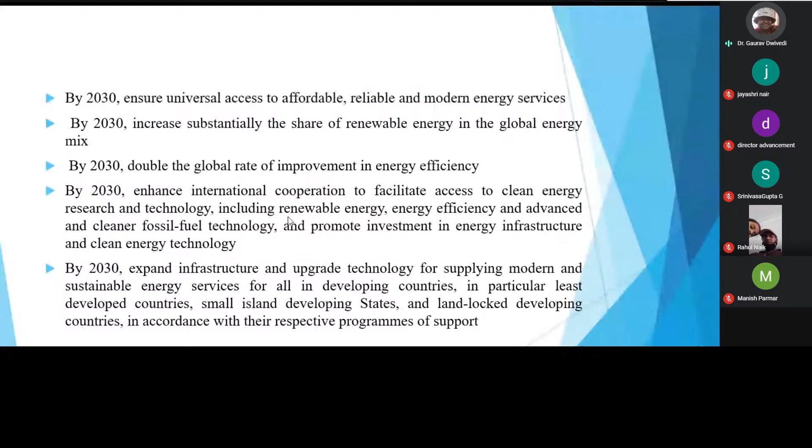By 2030, the goal is to expand infrastructure and upgrade technology for supplying modern and sustainable energy services for all, particularly in least developed countries, small island developing states, and landlocked developing countries, in accordance with their respective programs of support. So by 2030 we have set targets in the energy and renewable energy sector. India's target is to reduce the emission intensity of its GDP by 33 to 35% by 2030 from the 2005 level.

40% cumulative electric power installed capacity jump from non-fossil fuel based energy sources by 2030, a jump of 33% over non-fossil fuel capacity by 2015.

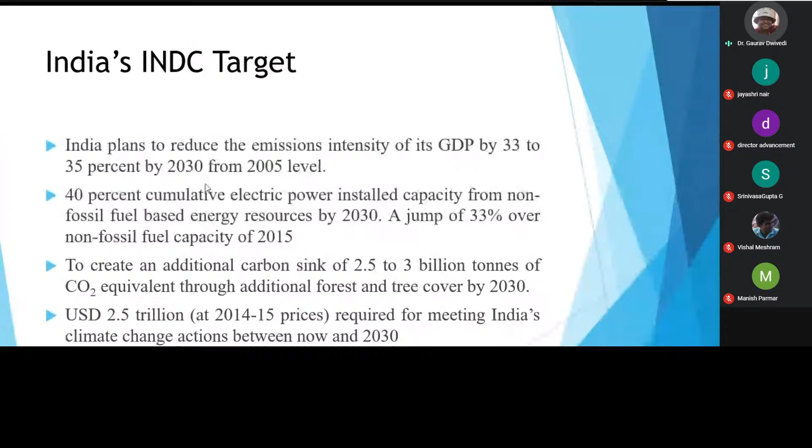To create additional carbon sink means we have to plant more trees, cover more area, up to 2.5 to 3 billion tons of CO2 equivalent through additional forest and tree cover by 2030. For this, we have to expend a lot of money, and the amount will be USD 2.5 trillion required for meeting India's climate change actions.

Now, what are the targets related to renewable energy? In the area of renewable energy, we want solar and wind energy to be increased from 4,060 megawatt and 23.76 gigawatt from 2015 level to 100 gigawatt and 60 gigawatt by 2022. And we are moving very fast in that direction, we are nearly achieving that solar and wind energy target.

It is envisaged to increase the biomass installed capacity to 10 gigawatt by 2022 from the current capacity of 4.4 gigawatt. So in the area of biomass, we have set the target of 10 gigawatt. Then a special program to promote small and mini hydro projects. New and efficient design of water mills have been introduced for electrification of remote villages and will continue to be promoted.

Now, what is happening is that in the case of large hydropower, when we want to develop it, the land area requirement and the ecology of that particular area gets disturbed. So the government of India is not promoting large hydropower. Instead, they are promoting small hydropower, which does not affect the environment and ecology of that particular area.

And what is meant by small hydropower? The power plants with a capacity of less than 25 megawatt are known as small hydropower. So the government is promoting those types of plants.

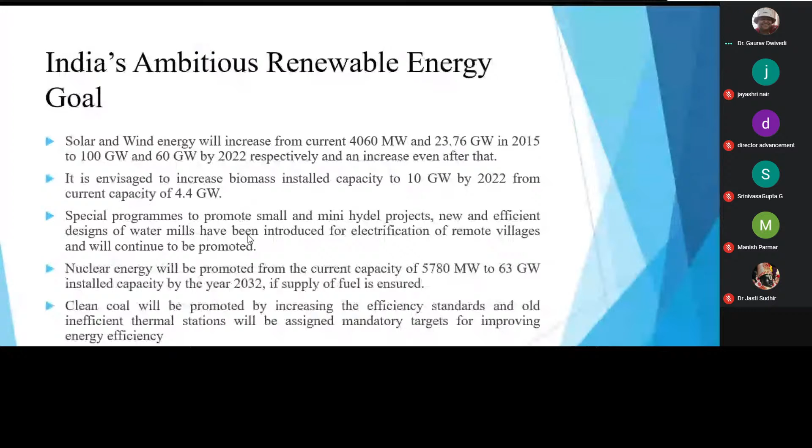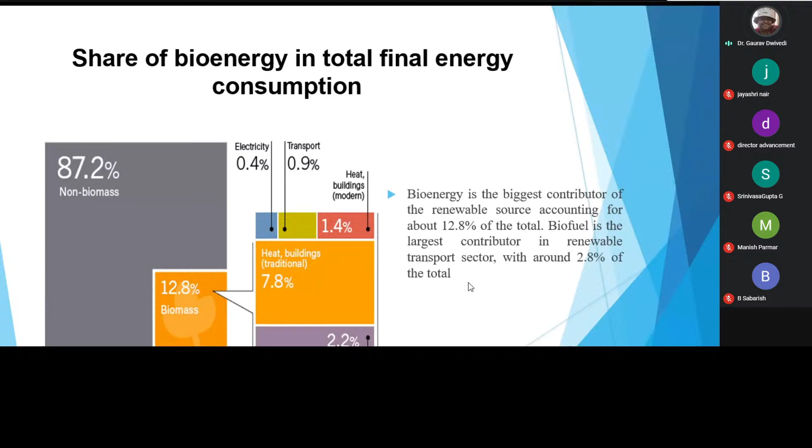Now, if we talk about bioenergy, it is the biggest contributor of renewable energy sources, accounting for about 12.8% of total. And biofuel is the largest contributor in renewable transport sector with around 2.8% of total. So biofuel is also contributing to the total transport sector in renewable energy.

Now, what is happening with our crude oil? We are importing large amounts of crude oil from other countries. Why are we importing? Because our domestic production is very less. If you see up to financial year 20, it is very less, and we are importing large amounts of crude oil, and this is increasing because we are not fulfilling our crude oil demand as per our requirement. We are not able to meet it, so we have to import.

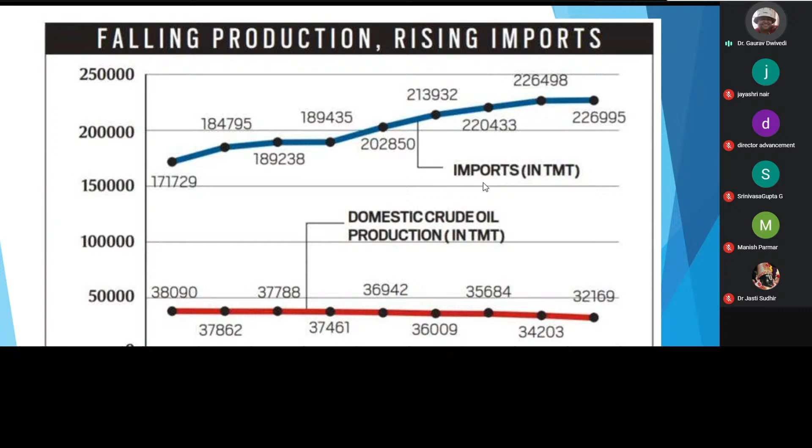So to overcome this import, we can develop various types of alternative sources like development of alternative fuel, electric vehicles. There are many options. We are working on that so that this import burden should go down.

So in that direction, the Government of India has developed the national policy on biofuel, and the national biofuel policy has set some targets. What are those targets? First is an indicative target of 20% blending of ethanol in petrol and 5% blending of biodiesel in diesel by 2030.

Then, with the thrust on advanced biofuel, the policy indicates a viability gap funding scheme for second generation ethanol biorefineries of rupees 5,000 crore over 6 years.

Then categorization of biofuel: basic biofuel or first generation biofuel includes bioethanol and biodiesel; advanced biofuel or second generation biofuels include ethanol drop-in fuels; and the third is algae-based third generation biofuel. So we have to categorize the various biofuel sources.

Then increase the scope of raw material for ethanol procurement by encouraging intermediate sugarcane juices, other sugar containing material, and damaged as well as surplus food grain. This is very interesting.

Actually, the production of ethanol is from sugarcane, but there are other sources. So the government has said that waste food grain can also be used as a source for production of bioethanol. So now this damaged and waste food grain can also be used.

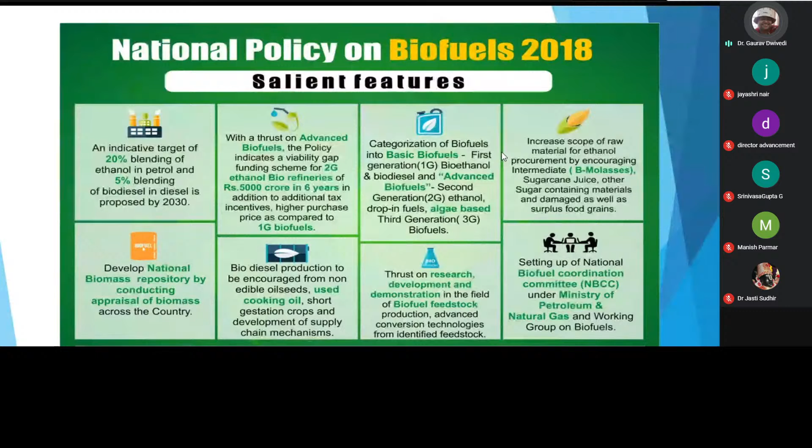Then thrust on research areas in the development of biofuel like biofuel feedstock production and advanced conversion technologies, and last is setting up of the National Biofuel Coordination Committee under the Ministry of Petroleum and Natural Gas and a Working Group on Biofuel. So these are some salient features of the National Biofuel Policy.

Now, some people may ask why the vegetable oil which we are using in our kitchen can't also be used for the development of alternative fuel. Now, if we use this vegetable oil as an alternative fuel, then there will be a crisis regarding food versus fuel.

So what can we do? We have categorized the oil which we are using for food purposes as edible oil, and the oil which we cannot use for food purposes as non-edible oil. In edible oil, we have canola, cottonseed, rapeseed, soybean, coconut, then mustard. There are various oils we can categorize as edible oil.

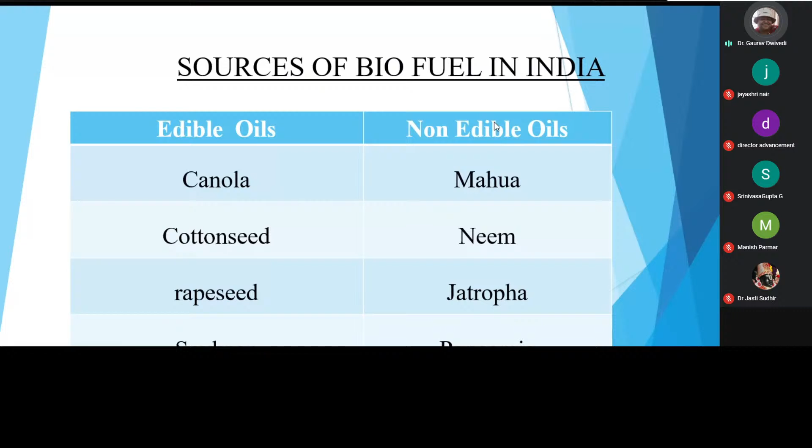Then we have non-edible oils like mahua and neem. Both oils are non-edible, but mahua and neem have their medicinal uses. So we cannot divert them for fuel production. Now we are left with Jatropha and Pongamia. Jatropha and Pongamia do not have very significant uses, so these can be used as biofuel crops in India. Jatropha is the number one crop in terms of area and number of trees. Pongamia is the number two crop.

Now, why are we not using the oil directly for engine operation? Why are we converting it into biodiesel? This is the one question that comes into everyone's mind. Why is it necessary to convert this oil into biodiesel? Why are we spending so much time and money to convert this oil?

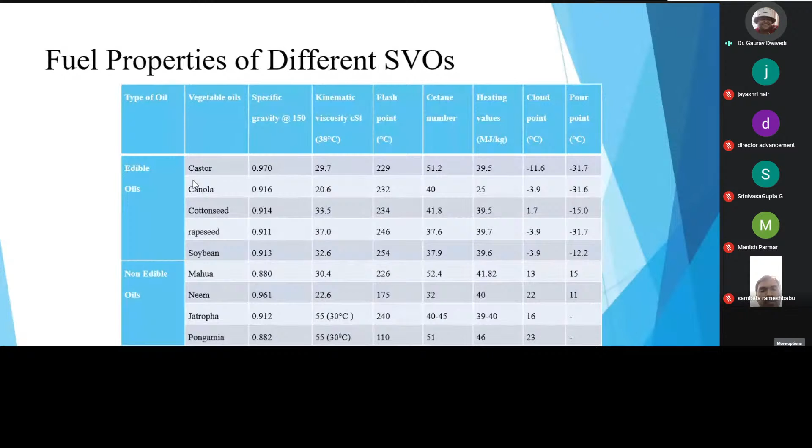Now, compare the properties of all the edible and non-edible oils with petroleum diesel. We have taken edible oil only for study purposes, not for actual use. The kinematic viscosity of the edible oil is all in double digits. Non-edible oil is all in double digits, while petroleum diesel is in single digits, 1.3 to 4.1. So the viscosity is 7, 8, 10 times higher than that of petroleum diesel for all the edible and non-edible oils.

It is like using curd or honey for engine operation. If you use oil with a viscosity like curd or honey, it will be very difficult for the engine to run. It will result in engine choking. There will be blocking of the fuel line and filter, and damage to engine parts. So we cannot use this oil directly for engine operation.

So what do we have to do? We have to reduce the viscosity. And how are we going to reduce it? By the process of transesterification. We convert the oil into biodiesel, and only then can we use it for engine operations.

There are other properties which are also very significant. The cloud point for some edible oils is negative, while for non-edible oils it is positive. The higher cloud point means the cold flow properties of these oils are very poor. So that is another issue we are facing. The cloud point of petroleum diesel is -15 to -5, so again we have to bring down the cloud point to that level.

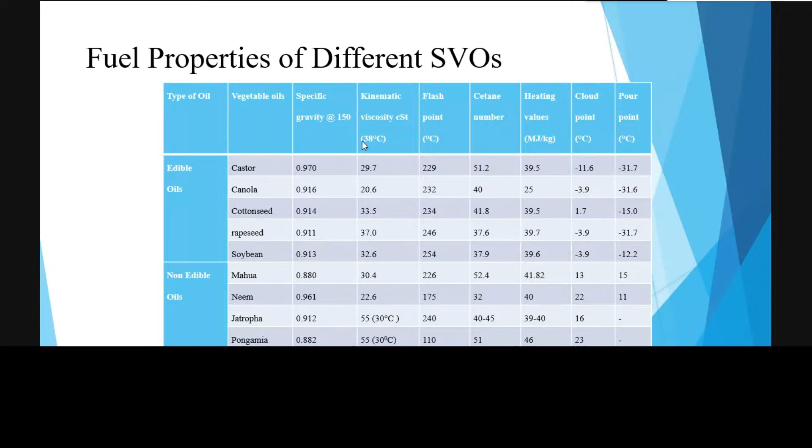The person who is very much interested in the area of alternative fuel or in the area of thermal engineering should know: if you want to develop any alternative fuel, you have to compare that fuel property with that of diesel, that is, the commercial diesel. Only if your fuel standard meets the property of diesel can you say that your fuel is going to replace diesel, or that it can be used along with diesel.

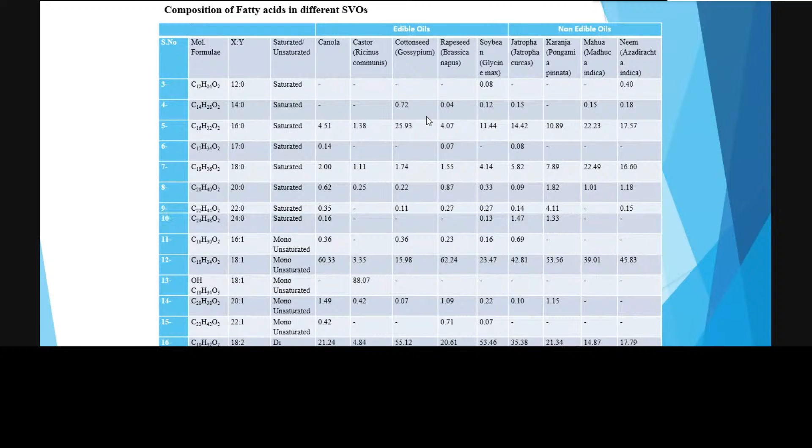We have to categorize it. If there is no bond, we call it saturated. If there is one bond, it is called monounsaturated. If there is more than one, we call it di, and if there are three or more, we call it polyunsaturated. So these are the various types of fatty acids present in the oil. These fatty acids affect the property of the oils.

If you see, as the percentage of saturated fatty acids increases across the oils from 2.74 to 45, the oxidation stability and the cold flow properties are affected. The highest saturated fatty acid has very poor cold flow property. That means mahua will freeze at 41.2 degrees temperature, so it will be very difficult to use mahua oil for engine operation. Similarly, for neem oil at 36.08, it will be very difficult to use below 27.1 temperature.

What is meant by cloud point? It means that at this point the oil will freeze. So if you are using neem oil as a fuel source, at 27.1 it will freeze, so you cannot use it for engine operation if the temperature is 25, 24 or 23. So we have to address this problem. Similarly, for the stability issue, it will not be stable for a longer duration of time. 1 hour means 1 month. Some of the oils are not even stable for nearly 1 month.

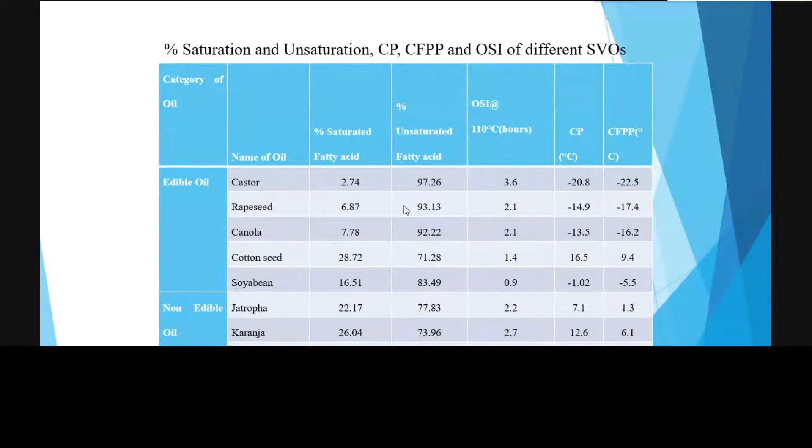So how can we store it at petrol stations? How will we transfer this oil from the industry to the petrol station, then to the various vehicles? So if the oil is not stable, we have to sort out this issue regarding stability and cold flow property. We will discuss all these problems in a coming topic.

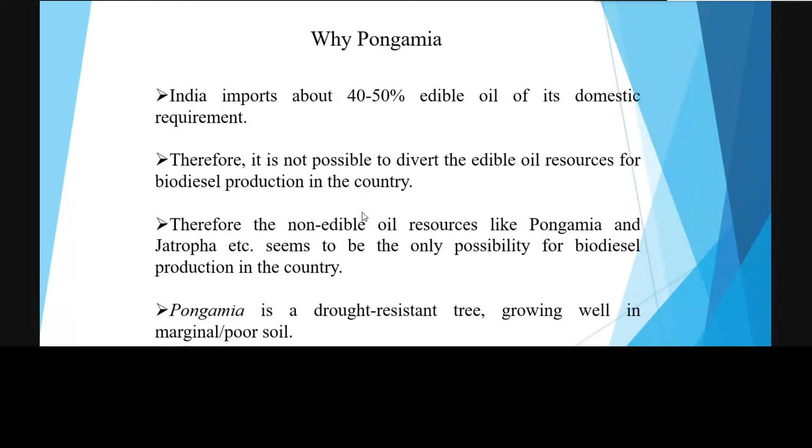But now we are taking the Pongamia oil source. We have already discussed that India imports 40 to 50% of its domestic edible oil requirement from other countries. Therefore, it is not possible to divert edible oil for biofuel production, and we are left with oil sources like Pongamia and Jatropha. Pongamia is a drought resistant tree growing well in marginal or poor soil. That is one characteristic of Pongamia.

Now the distribution of Pongamia worldwide: it is available in India, Myanmar, Philippines, Malaysia, Australia, Seychelles, USA and Indonesia. Distribution in India is Andhra Pradesh, Odisha, Bihar, Jharkhand, Chhattisgarh, Madhya Pradesh, Karnataka, Kerala, West Bengal and Maharashtra. A large number of states contain Pongamia.

The average seed contains 28 to 34% oil. From one seed you get 28 to 34% of oil. From one tree you will get 8 to 24 kg of seeds. Pongamia oil is used to a small extent in lighting, soap making, medicine and lubricant. These are very small uses.

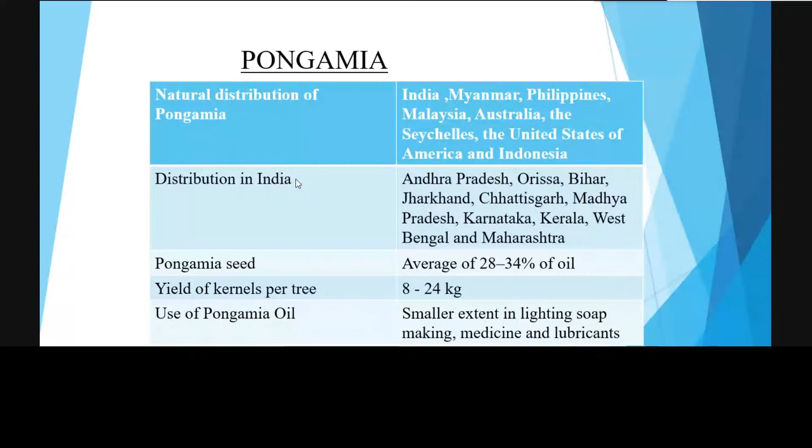It does not have any direct major uses. So this is the one reason that we are using the Pongamia as a biofuel source. If you compare Jatropha and Karanja, Pongamia also known as Karanja, we are comparing the area of major trees for biodiesel production. We can see that Jatropha is the number 1 crop in terms of area, and Karanja is number 2.

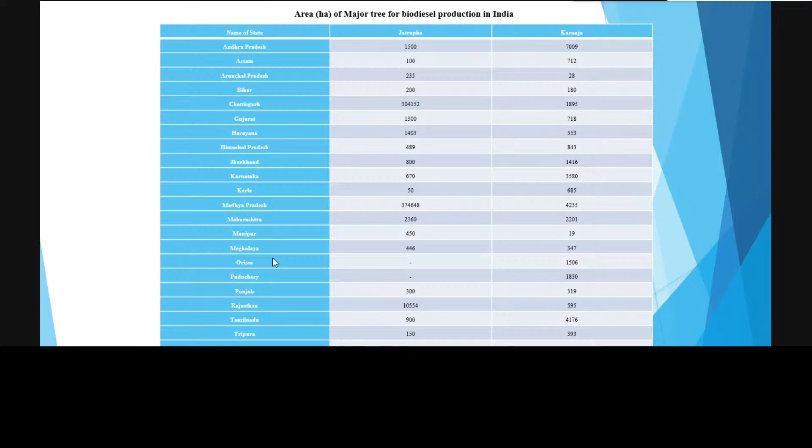So these are the 2 non-edible oil crops, and the distribution is mostly in all the states of India. Local names of Pongamia in various states: in Andhra Pradesh, Ganuk or Pongu; in Karnataka, Honge; and in Madhya Pradesh it is known as Karanja or Karanj. It is usually known as Karanja, and there are various local names available. Now this is the data which I have obtained from the literature.

Now the portion of Design Expert which we are going to discuss starts from this table, and you have to focus more from this table. Till now we have been discussing the introduction part. Now, why do I have to use the Design Expert software in this case?

Now palmitic acid, stearic acid, oleic acid, these are the various acids present in the Pongamia oil. There are various literature and manuscripts available related to this Pongamia oil. Some have reported the percentage 3.7, some in between, and the maximum reported is 14.1. So I have put the range 3.7 to 14.1, minimum to maximum, so all the range is covered. Stearic acid 2.4 to 10.9.

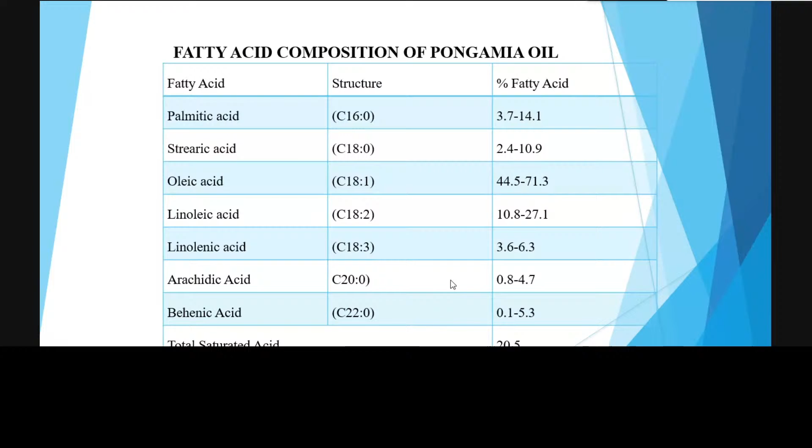So from the literature, I have calculated the fatty acid range for Pongamia oil. After that, I have taken the average: saturated fatty acid is 20.5 and unsaturated is 79.5. Similarly, I have obtained the properties of Pongamia oil from the literature and found the viscosity. Minimum viscosity given is 27.84 and maximum is 38.2, which is nearly 8 to 10 times higher than that of diesel.

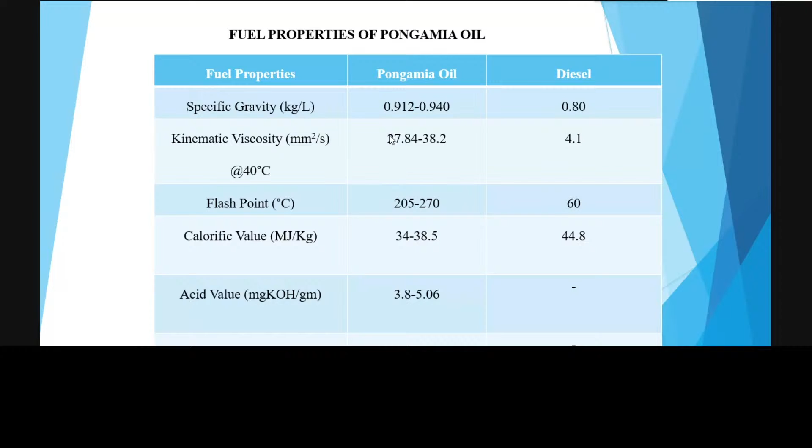So this is the one issue. That's why we are going to convert the Pongamia oil into biodiesel. From this literature data, we find that the viscosity is very high, and we have to address this issue. Now, how are we going to convert it? There are various methods: blending, microemulsification, cracking, and transesterification. Transesterification is the unique and simpler manner in which we convert it into biodiesel.

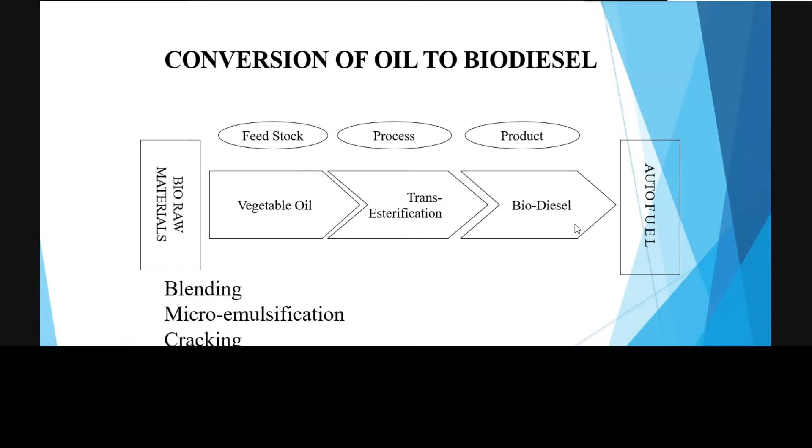We take the raw material, vegetable oil, as a feedstock, and with the transesterification process, we convert it into biodiesel, the automotive fuel. Now, what is the transesterification reaction? We have triglyceride, the formula for oil, CH2O-COOR. We react it with alcohol, methanol or ethanol, CH3OH, and we have a catalyst to speed up the reaction: acid or base, homogeneous or heterogeneous. There are various types of catalyst available. We can use natural catalysts also.

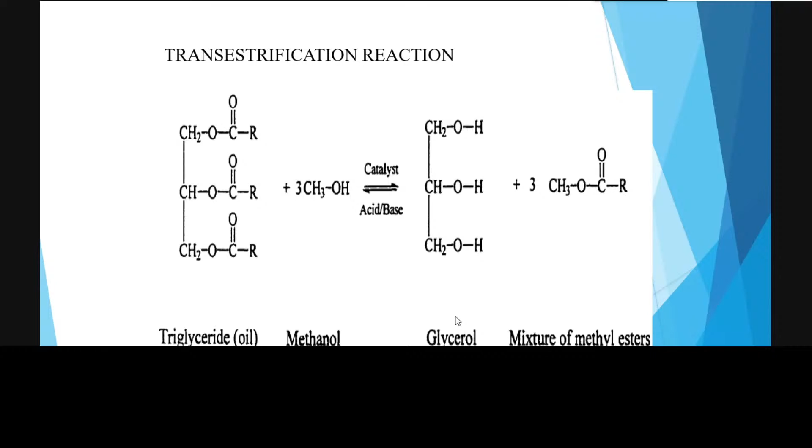After that, we obtain two products. One is the mixture of methyl esters and the other is glycerol. The mixture of methyl esters is known as biodiesel. Glycerol is a secondary product used by the soap making industry; glycerol is a basic constituent of soap. So there are two products: the mixture of methyl esters, the biodiesel used by the automotive industry, and glycerol used for soap formation by the soap industry.

Now, I searched the data regarding how to optimize biodiesel production, so that my process will give the maximum yield. I did a lot of literature review and studied a lot of papers, and in the transesterification process these parameters are very important. One is catalyst and its concentration. Second is molar ratio, the ratio of alcohol to oil, then reaction temperature, and mixing intensity in RPM, or time in hours. So we have to optimize these four parameters to maximize the yield.

I studied various papers; some used KOH as a catalyst with concentration 0.25 to 1.5, molar ratio 6:1, reaction temperature 65, mixing intensity 600, and yield was not given. Some directly reported a yield of 80%. So we studied various papers and found that various yields were obtained with the same catalyst, different molar ratios, somewhat different reaction temperatures and mixing intensities, and yields of 95% and 96% were obtained.

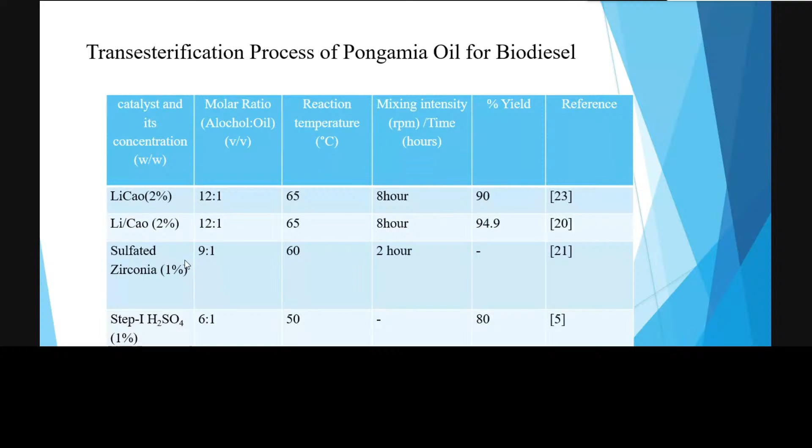In some cases, 97% yield was also obtained. Some have also used NaOH as a catalyst, some have used H2SO4 as catalyst, and in the case of NaOH, the yield was up to 99% in some cases. Then some have used Li/CaO as a catalyst, and some have used sulfated zirconia as a catalyst. So various types of catalyst and their yield with the help of different molar ratio, reaction temperature, and mixing intensity were obtained. So I have studied all the data.

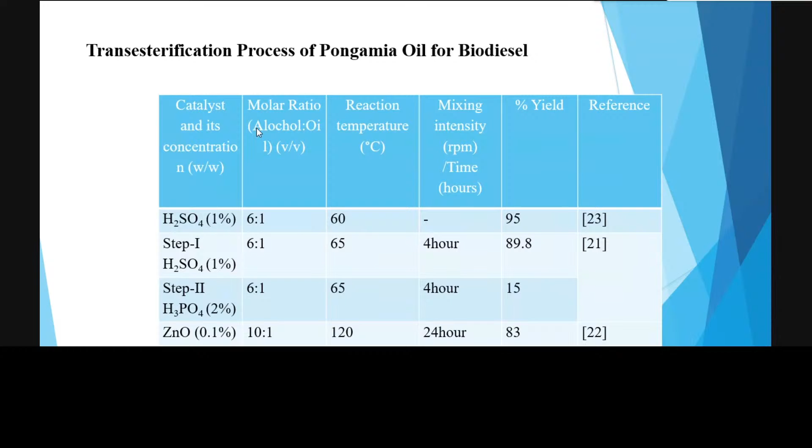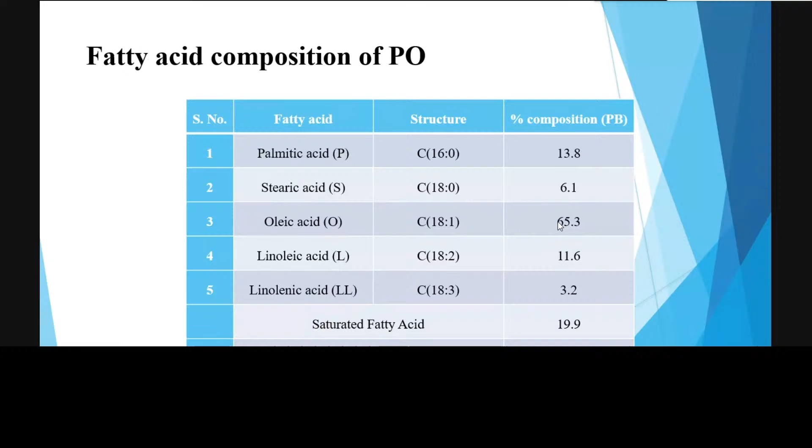After that, I purchased the oil and calculated the fatty acid with the help of the GC technique. This fatty acid composition was calculated in the lab, and we find the saturated fatty acid and unsaturated fatty acid are 19.9 and 80.1. So this is the data of fatty acid which I obtained in the lab. The previous table which I have shown regarding the fatty acid composition was from the literature.

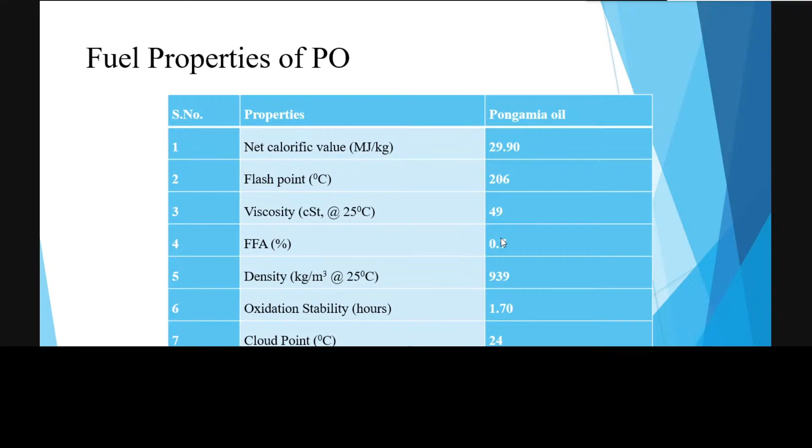Again, the fuel property: the calorific value is 29.9, compared to diesel. The viscosity is very high, 49, way higher as compared to diesel, which is 1.4 to 4.1. Calorific value is low as compared to diesel. Viscosity is very high, and the stability is also not very good. Cloud point is also very poor. So we have all types of problems in the Pongamia oil. So what did we decide? We decided to use response surface methodology.

Response surface methodology is a collection of mathematical and statistical techniques useful for analyzing problems in which several independent variables influence a dependent variable or a response, and the goal is to optimize this response. So we are taking a large number of variables, and with the help of them, we are going to optimize. We can do two things: either maximize the yield or optimize the parameters. If you do not focus on the yield part, then we can optimize the parameters. If you want to maximize the yield, then we do not bother about the parameter range.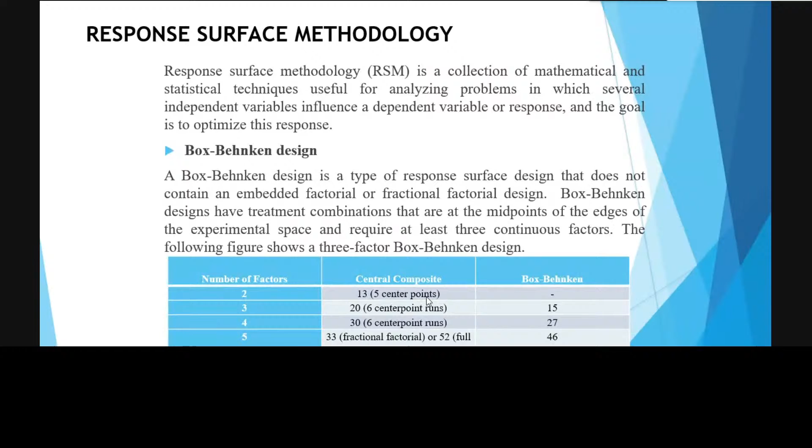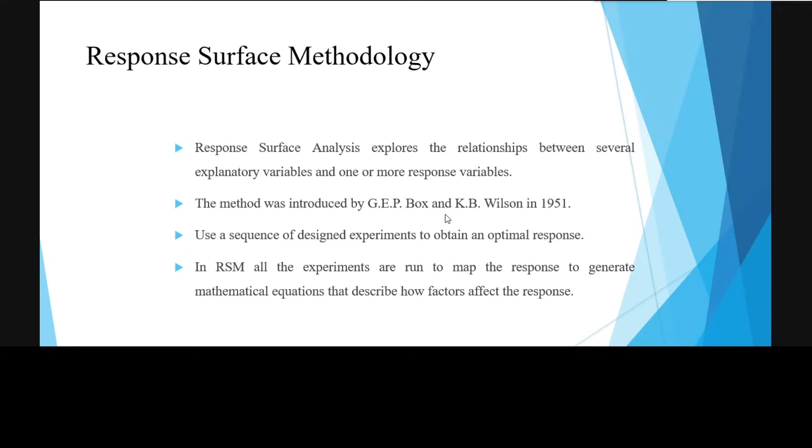Response surface methodology explores the relationship between several explanatory variables and one or more response variables. The method was introduced by G.E.P. Box and K.B. Wilson in 1951. It uses a sequence of designed experiments to obtain an optimal response. In RSM, all the experiments are run to map the response to generate mathematical equations that describe how factors affect the response. So with the help of equations, we are going to solve the problem.

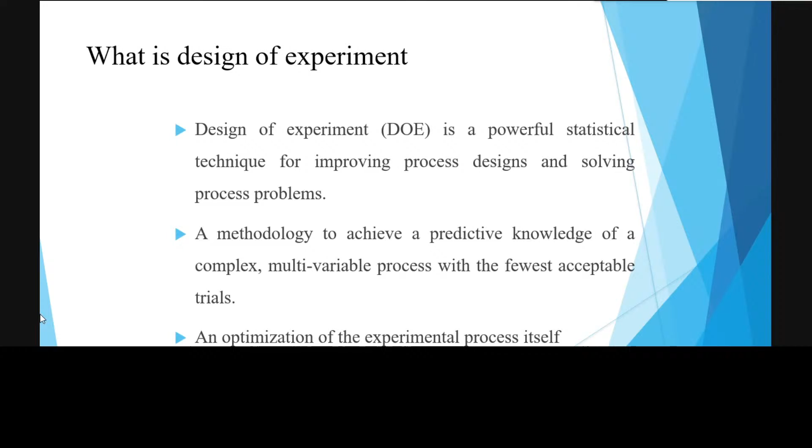Design Expert is a statistical software package from Stat-Ease Incorporated that is specially dedicated to performing design of experiments. Design Expert offers comparative tests, screening, characterization, optimization, robust parameter design, mixture design, and combined design. Now, what is design of experiment? Design of experiment is a powerful statistical technique for improving process design and solving process problems. A methodology to achieve predictive knowledge of a complex multivariable process with the fewest acceptable trials. So we have to perform a very few set of experiments to get the yield and optimization of the experimental process itself.

What is the benefit? First, it reduces the time to design a new process. If you are designing a new process with a large number of experiments, then with the help of design of experiment software, we can reduce the time. If you have to perform like 100 sets of experiments, with the help of Design Expert software, you do not have to do hundreds. You will get the same result by performing only 20-30 sets of experiments. That is the most important one. It is time saving.

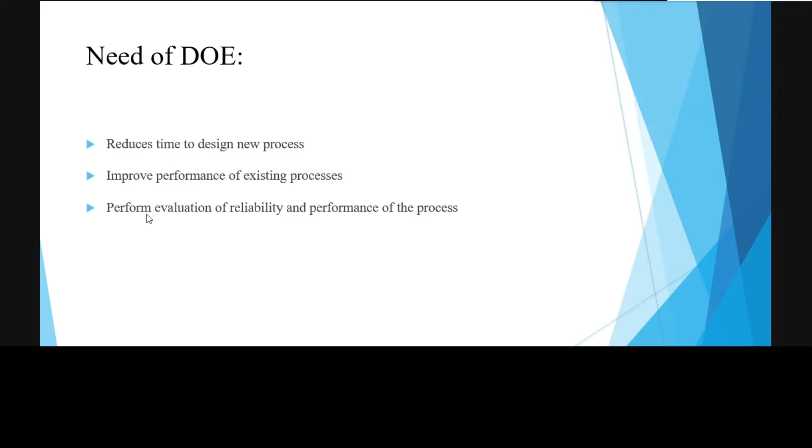Then it improves the performance of the existing process. It performs evaluation of reliability and performance of the process. One thing I have not mentioned here is that it reduces the error also, meaning the error percentage will go down with the help of using software. Not only this software, if you are using any type of software, the chances of error will be very less.

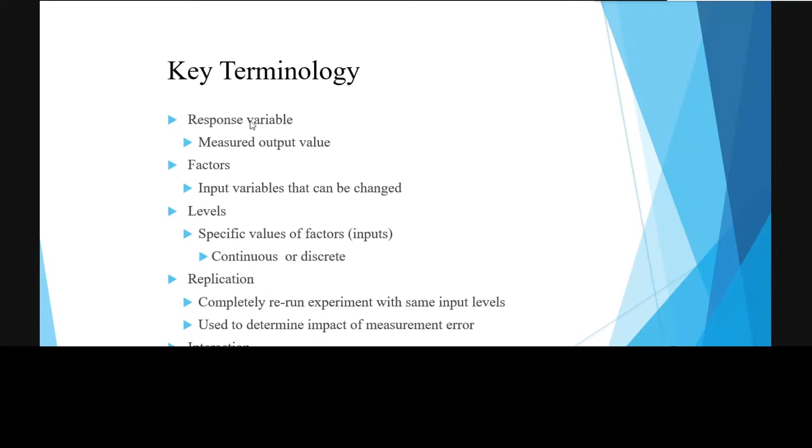First, we have to define a problem. What is our problem? A problem may be very big in nature, and it will be very difficult for an individual to address that problem. So what will he do? He will determine some objective. He will not solve the whole problem. He will bifurcate the problem into 2-3 parts.

For example, if you want to develop any alternative fuel, there will be a production part, there will be fuel quality, and then there will be engine operation. So one student can take the production part, one will enhance the fuel quality, and the third will see the engine operation. And they can also perform in a group. So you have to determine some specific objective.

After the brainstorming, you have to find out what type of experiment you can do. You have to design the experiment. Designing the experiment means the experiment may be software analysis, the experiment may be an experiment in the lab, or these days, in the time of COVID, some experiments can also be survey-based experiments.

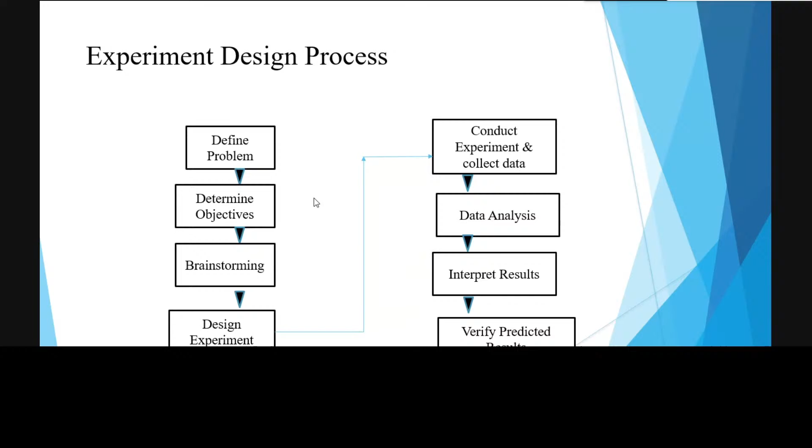And this experimental design process is applicable for everyone who is working in the science and engineering community. He has to do it like that only, if you are performing any experiment and analyzing the data.

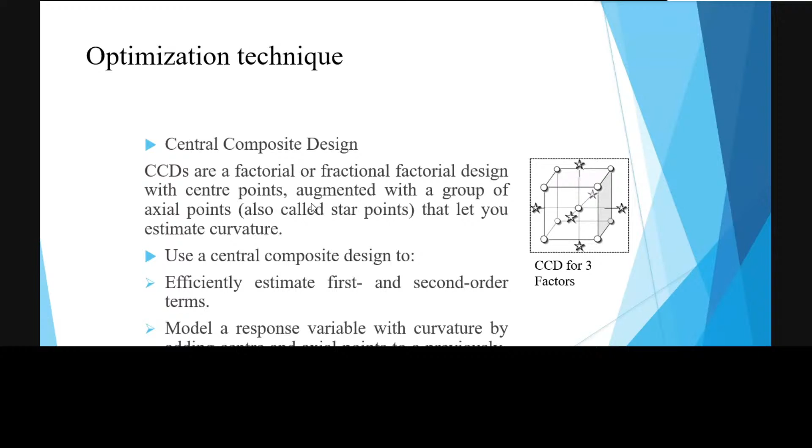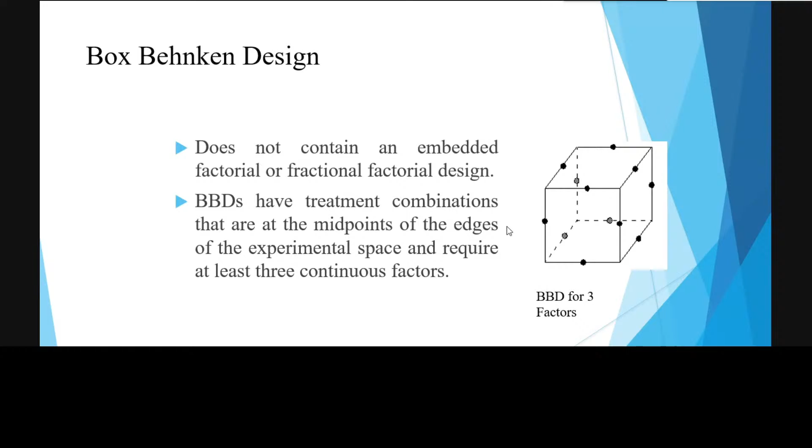What is the midpoint value? You are going to see that in my design. I'm going to explain that. We have compared the BBD and CCD techniques. BBD is better, less expensive to run, and the number of experiments is less. So this is better as compared to the previous one.

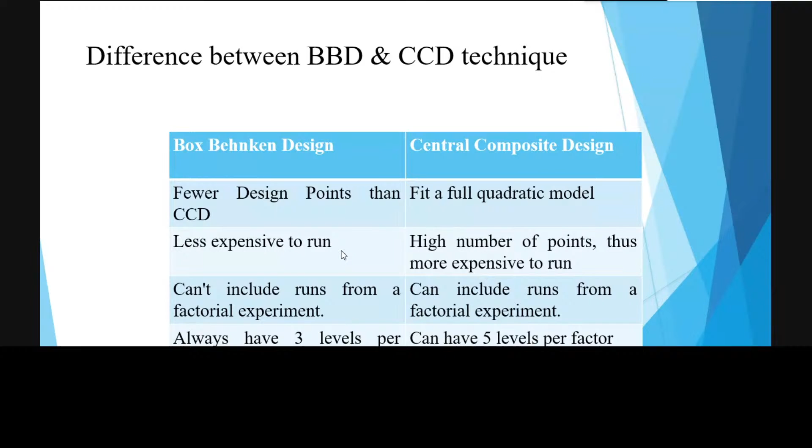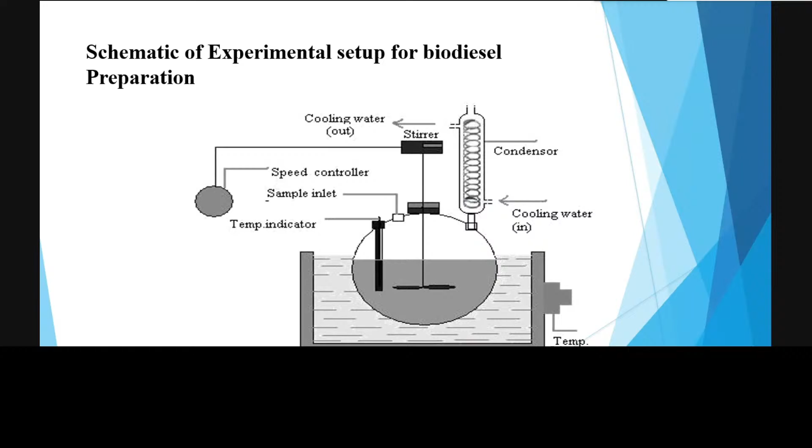Then there is a stirrer. The stirrer will help us to rotate and mix the oil, alcohol and catalyst in this reactor. Then we have a condenser to control the temperature of that particular reactor. So this is the basic schematic setup for the biodiesel production process.

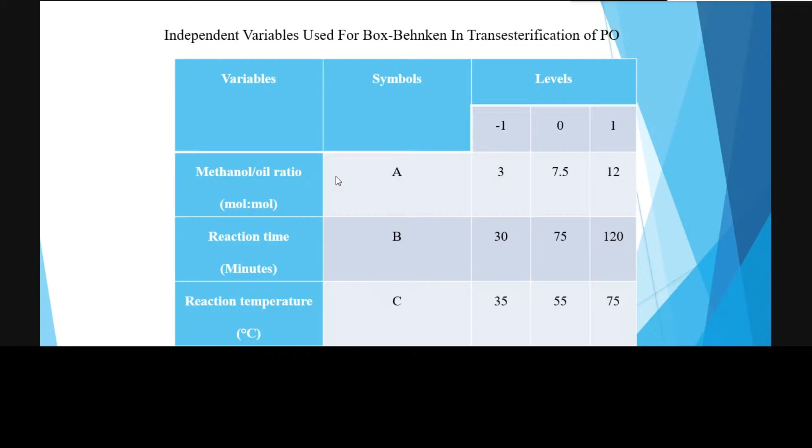So you can put any symbol as per your convenience. After that, it will ask you for a range - what is the minimum value and what is the maximum value. Now people will wonder why I have written 3 and 12. I have shown you the tables of literature review, and in that table I have compiled the data that minimum methanol oil ratio was 3:1 and maximum was 12:1.

So from the literature review data, I put the minimum to maximum value. Similarly, for reaction time, 30 minutes is the minimum and 120 minutes was the maximum. Reaction temperature, 35 was minimum and 75 was maximum. Catalyst percent was 0.30 minimum and 1.5 maximum. You can put your own equation, your own parameter, and your own minimum to maximum value in this level, with your own symbol. So you just have to replace this variable, the minimum and maximum value, if you are performing in any other area.

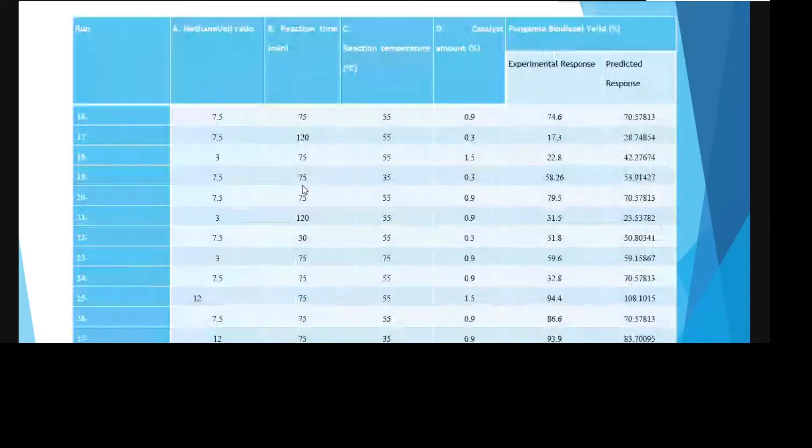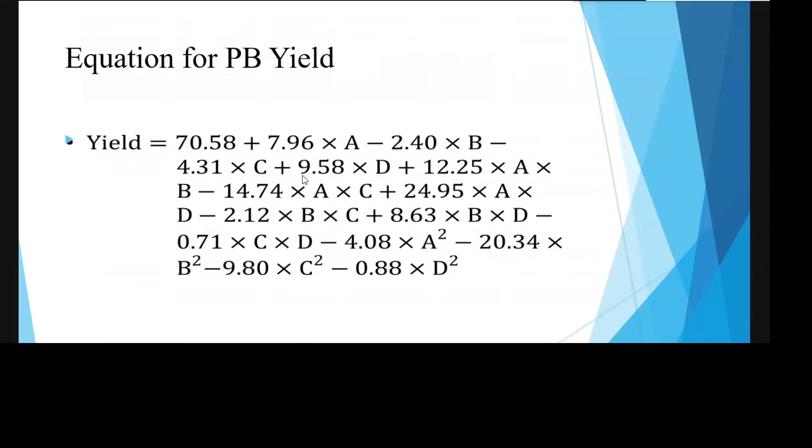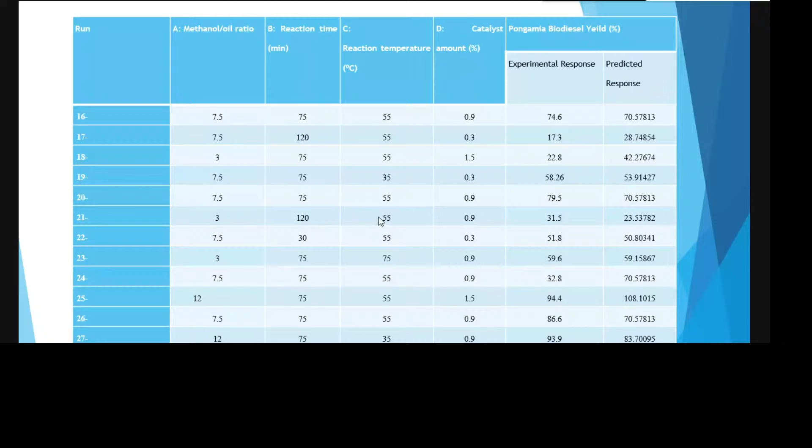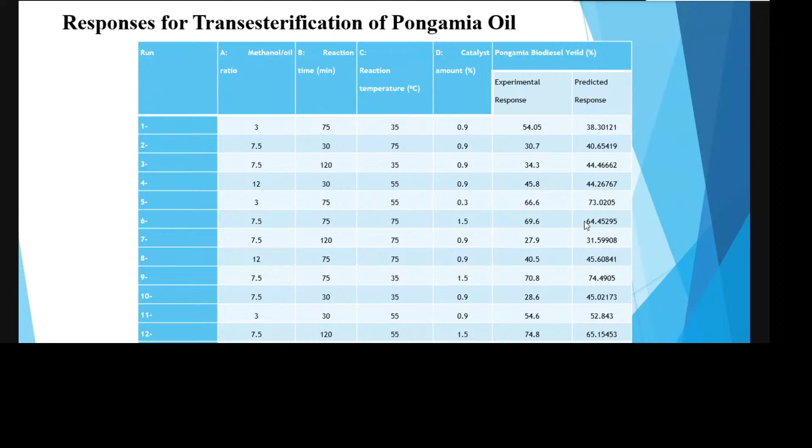So what we have to do? We have to put the A, B, C, D values 3, 75, 35, 0.9. When we put all these values in this equation, we got the predicted response. So we got two types of response - one is the experimental response, which we got in the lab, second is the response we got through the equation, that is the predicted response. For the same set of experiment, we got two responses, and both will be of different values, which we got through the Design Expert software.

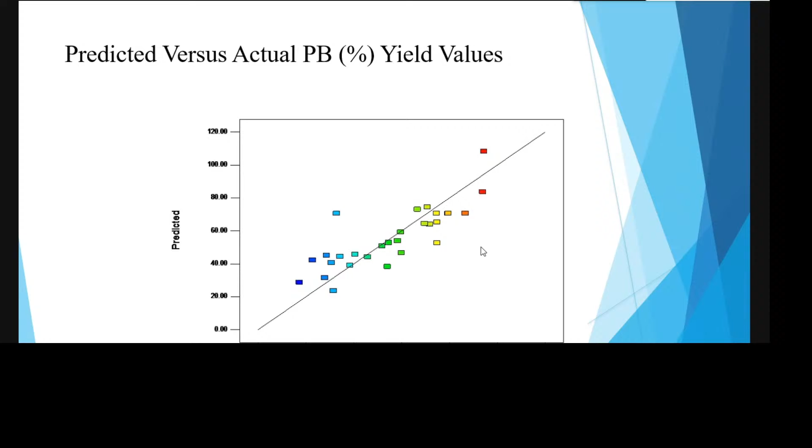Now this graph is automatically developed - predicted yield versus actual yield for Pongamia biodiesel. And now we have analyzed a 3D diagram, three-dimensional diagram, with the help of Design Expert software for the biodiesel production process.

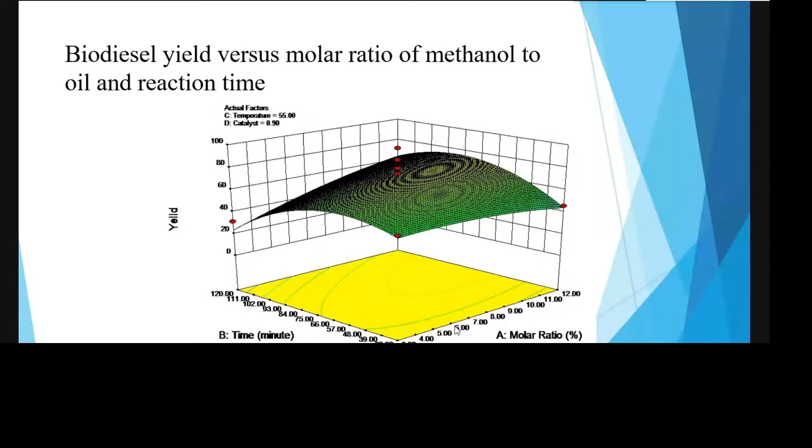Now, if we see the time, if we increase the time, the biodiesel yield is also increasing. So if the time is increasing up to 75 minutes, the biodiesel yield is also increasing in that direction. After 75, at 84, 93, 102, it starts deteriorating. So yield starts deteriorating after 75 minutes. This type of analysis we can obtain from this 3D graph. Similarly, for molar ratio, as the molar ratio is increasing, yield is also increasing.

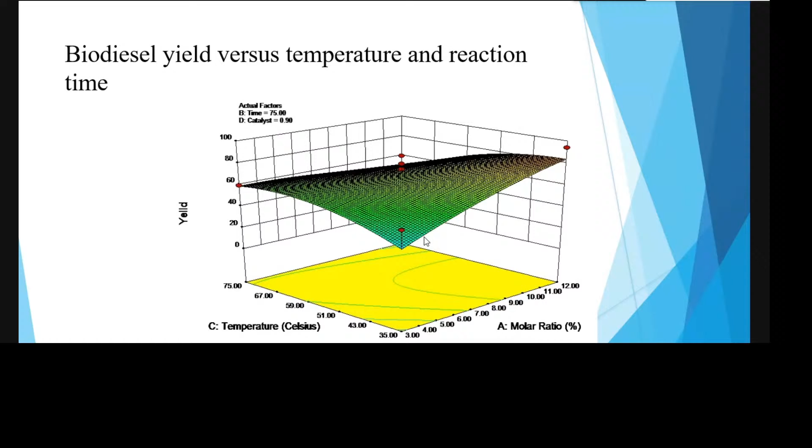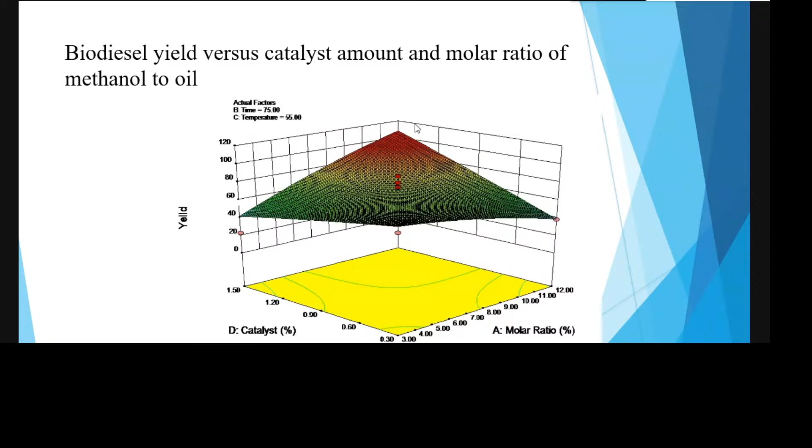We have obtained one table of predicted response. In theory, yield can go more than up to 100% in theoretical response. In actual response, it will be less than 100, or up to 100.

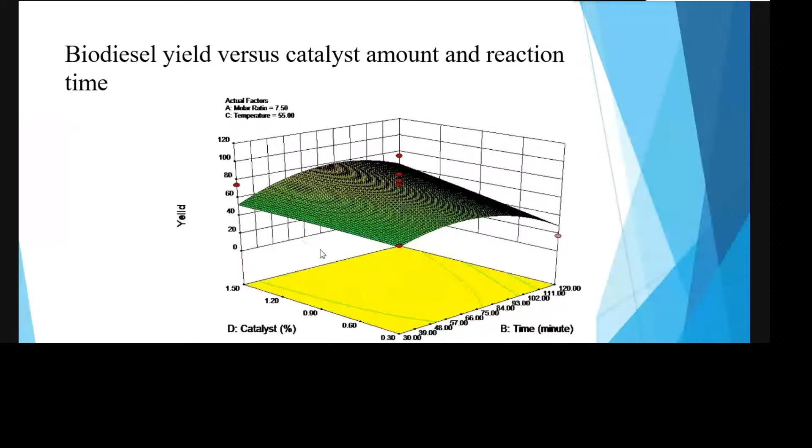Similarly for time and temperature, we got the yield variation. Similarly for catalyst and time, different sets of graphs are obtained. Various types of graphs are obtained. Now, what is our target?

What is our target in this experiment? Our target is, as I have already told you, either you can optimize the parameter or you can maximize the yield. In my case, I have maximized the yield. I want maximum 100% biodiesel production. I don't worry about the parameter.

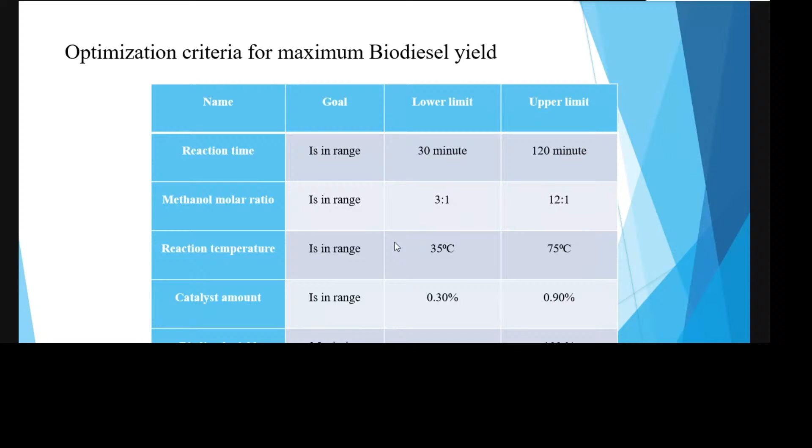So reaction time should be in range 30 minutes to 120 minutes. Methanol oil ratio 3:1 to 12:1. Reaction temperature 35 to 75. Catalyst 0.30 to 0.90. These are my values, and I want to maximize the yield to 100%.

After putting the experiment and predicted value, I got the final model validation value and final set of experiment. If you perform the experiment in Design Expert software, you will get at least near about 100 solutions. Out of those 100 solutions, you can choose any one as per your choice. This is the one solution which is in range and meets my criteria.

So methanol oil ratio, if I take 11.06:1, reaction temperature 56.6, catalyst percentage 1.43, reaction time 81.4 minutes, I should get the biodiesel yield of 100%. This is the theoretical value that I should get, 100% biodiesel production as per theory.

But when I perform it, there may be human error, instrumental error, or some error due to the quality of the oil or nature of the chemicals. So I got the yield of 98.4%. The percentage error is 1.6%. This is the difference between the experimental and predicted yield.

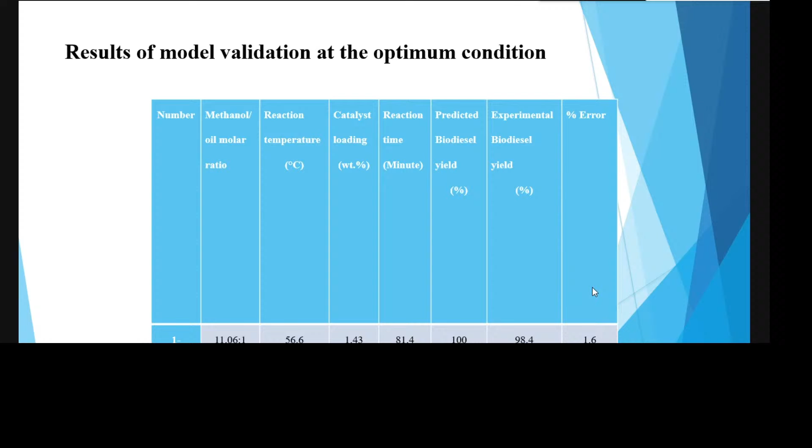So with that, I can finally say that this type of result is obtained: 98.4% biodiesel yield with the help of Design Expert software is obtained.

Now you can see how easily I have completed this process. The overall total process includes only working of 2 months. Within 2 months, I got this result, and this work is published in the Journal of Fuel, which is a very reputed journal in the area of alternative fuel.

So, with the help of this software, you can do similar type of work.

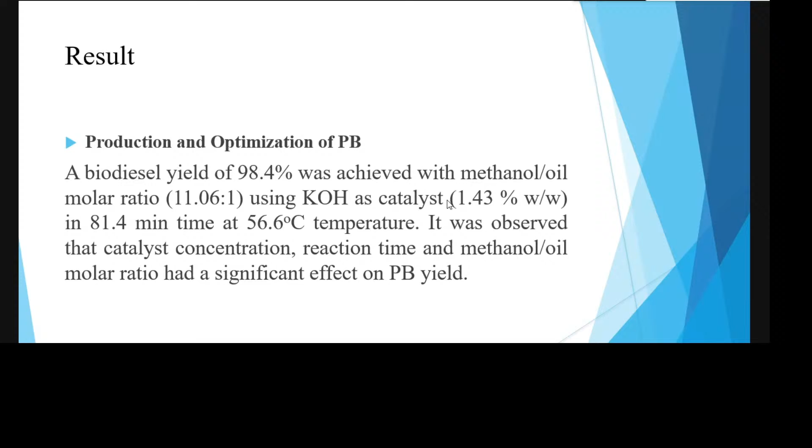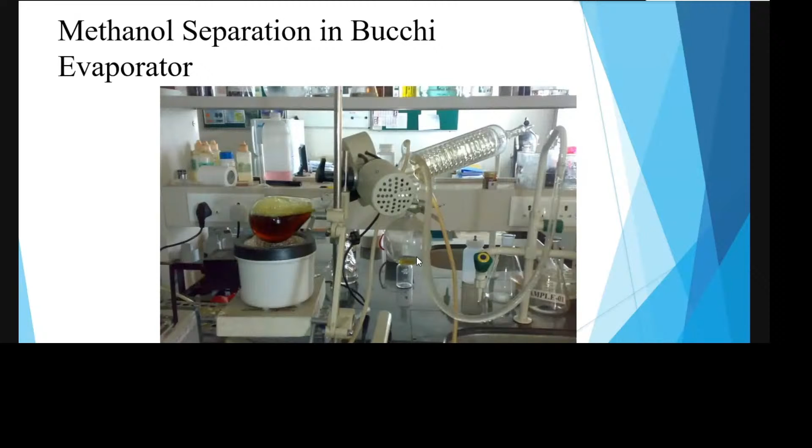After the biodiesel production process, the biodiesel that we obtained contains alcohol. The boiling point of alcohol is 60 to 70 degrees, and we do not want alcohol to be part of the biofuel. So what we do, we put a heater, and this is the reactor known as a Buchi evaporator. We heat the biodiesel, and due to the low boiling point of methanol, it's segregated into another chamber, and then it is again in pure form. It can again be used for another process.

So what we have done is obtained the Pongamia biodiesel, and we have compared the properties of Pongamia biodiesel with some other fuels, like diesel, ethanol, and kerosene. The kerosene is for study purpose only.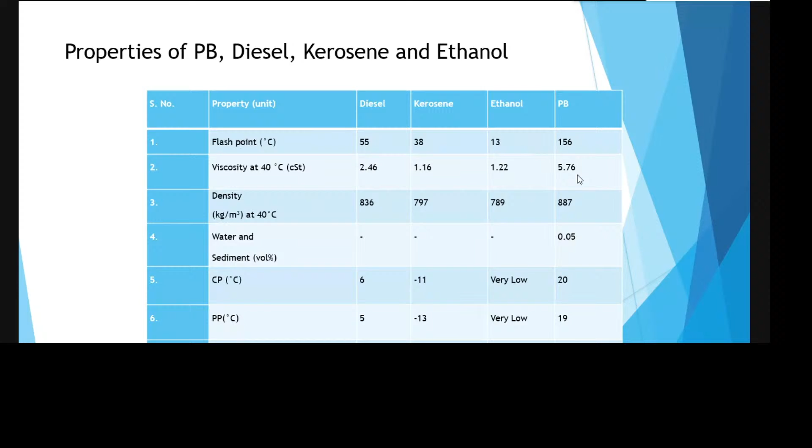Now it can be used, but it cannot be directly used right now. We have to blend it. So what we have done is prepared various types of blends. This is the PB100; PB100 means the pure biodiesel, 100%.

And we have measured the cold flow property, cloud point and pour point. It is higher, so what we have done is prepared different blends like PB20, that is 20% Pongamia biodiesel, rest is diesel. So the cold flow property improves.

We have also prepared blends with ethanol. When we mix the 100% biodiesel with ethanol, that is PBE25 - ethanol is 25% and 75% is Pongamia biodiesel - the cloud point comes out to be 6 and 5. And the cloud point for diesel is also 6 and 5. So we can develop one fuel which is a mixture of Pongamia and ethanol, and it has cold flow property similar to that of diesel.

But the calorific value is on the very low side. Low calorific value means you have to pay more for the same distance, because for the same energy production you have to spend more fuel. So for people interested in thermal engineering, except hydrogen, all other alternative fuels have lower calorific value than conventional fuels. Hydrogen has a very high calorific value, 2 to 3 times more than diesel. So except hydrogen, all other fuels have low calorific value.

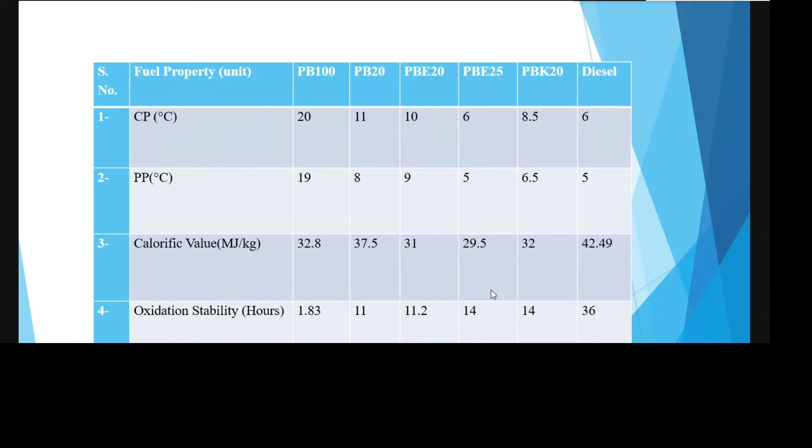Now, what is India doing in the area of alternative fuel? What has India recently done? India's low cost airline SpiceJet operated the country's first flight using biofuel on 27 August.

SpiceJet deployed a Bombardier Q400 on the Dehradun-Delhi route, carrying a blend of 75% air turbine fuel and 25% biofuel. This is very interesting because they developed the biofuel from Jatropha, and it is locally developed by CSIR and the Indian Institute of Petroleum. The biofuel met the specification standards for commercial applications, and such a blend can potentially reduce the carbon footprint by 15%.

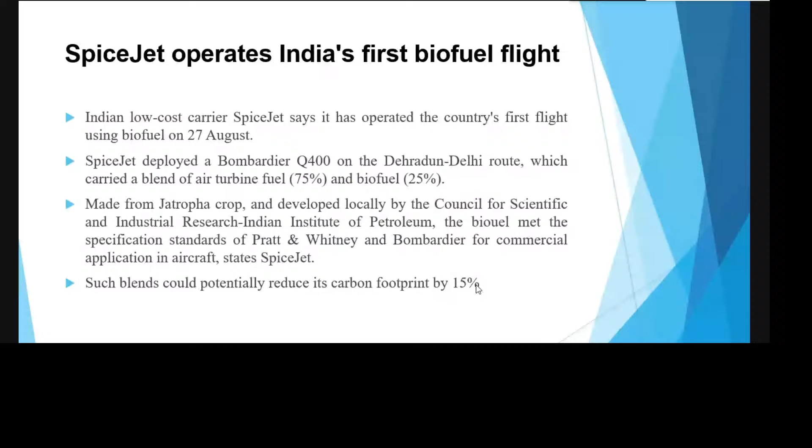In other areas of alternative fuel, the Government of India has also developed several types of institutes. We have a wind energy center at Chennai, a solar energy center at Gurugram, and similarly a small hydro center at IIT Roorkee, which works in the area of hydro energy.

Similarly, we have the Biofuel Research Institute known as Sardar Swaran Singh Biofuel Research Institute, located at Kapurthala in Punjab. People working in the area of biofuel production and alcohol production as alternative fuel - the institute is working in that direction also.

Indian Railway has substituted high speed diesel with methanol in locomotives. Niti Aayog has directed Indian Railway to develop a dual fuel methanol locomotive. RDSO, in association with IIT Kanpur, is working on the development of a dual fuel methanol engine.

These are the various initiatives taken by the Government of India. Other than that, the government has also given incentives for the development of alcohol based crops with the help of waste damaged food grains. These food grains are thrown away or eaten by rodents, but now they can be directly used for biofuel production. The government is also promoting sugar based crops like beetroot, or other crops like corn, for biofuel production.

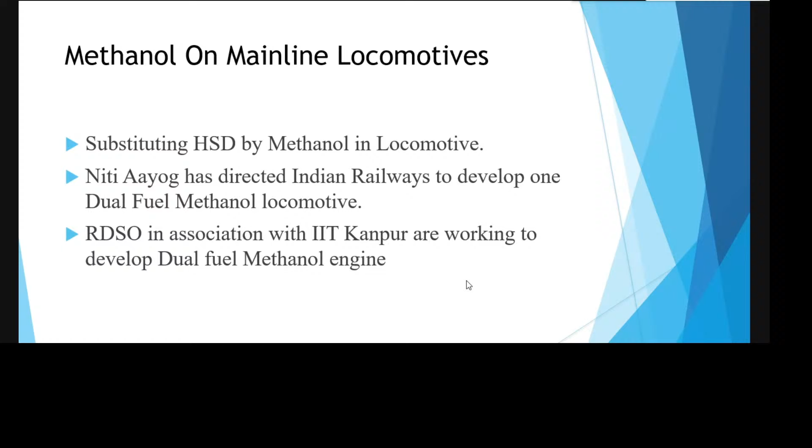Various countries like Brazil, USA, and Canada are working in this area - they have already developed various types of engines which run on these alternative fuels.

So what is the future scope? The future scope is that Pongamia biodiesel should be used in neat form, that is B100. I have already told you that we used the blended form. When we use the blended form, we cannot predict the actual behavior of that particular biofuel source. So for development of any alternative fuel, you have to run the engine for a longer period of time.

The issue with our research system is that we want to publish papers as early as possible, so we run the engine for a shorter period of time. If you run the engine for a longer period of time, then only can we get substantial results that can be used for actual field applications.

So that is one future recommendation, that future candidates should do the performance study of neat clean biodiesel. Then, what are the effects on engine parts - injector piston ring, piston cylinder, smoke emission - may be studied in detail. The relationship can be developed between percentage unsaturation, and what is the relationship between various fatty acids and fuel consumption - that can also be studied.

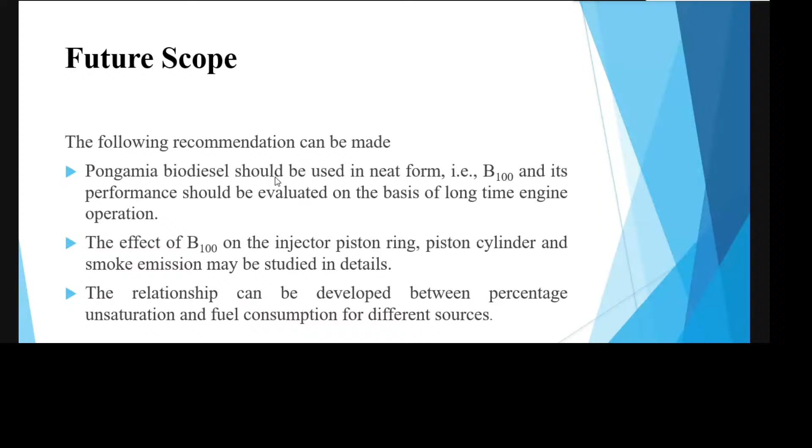So these are some future scopes. In my lab, I'm working in the IC engine and fuel lab at the Energy Center at MANIT Bhopal. We have some opportunities for BTech internships available in the area of renewable energy, solar, wind, biomass. So you can apply for a 1 month to 6 month internship. For MTech project work, you can collaborate with us. We have 2 branches, MTech renewable energy and green technology. Both are admission through GATE.

And then I have some PhD positions available with MHRD fellowship. You can apply on the institute website for that. And my contact details are these. For future collaboration, you can contact me, so we can work in the area of alternative fuel.